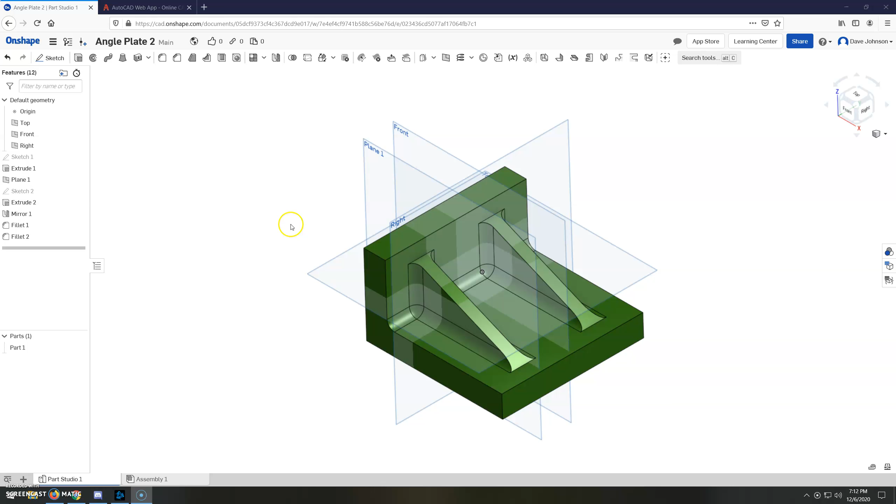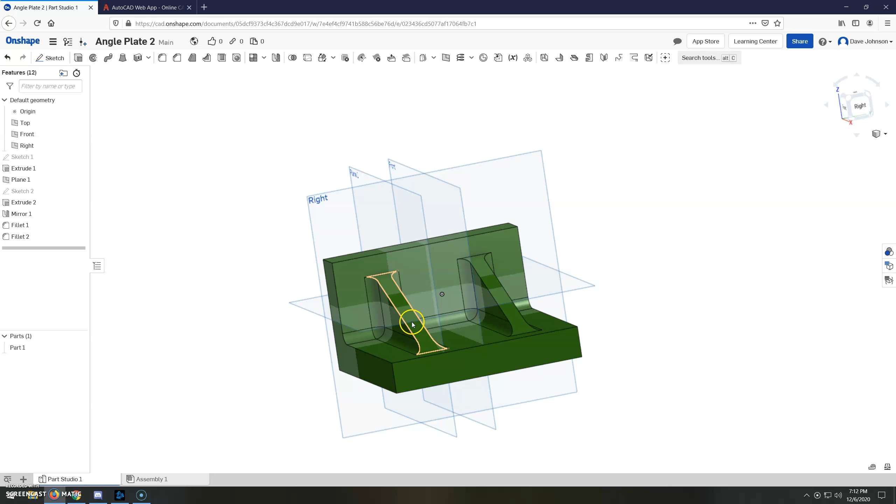Okay, today we are going to be building the angle plate in Onshape. Just take a quick look at this. It's basically composed of some basic shapes. We've got the L extrusion here, and then we have two things called ribs or webs right here, which are symmetric and relatively centered up. And then we've got a bunch of fillets to round everything out.

So let's take a look at our drawing. It's relatively simple, but there's a few things we need to be able to determine from it. So number one is the overall size of our L shape.

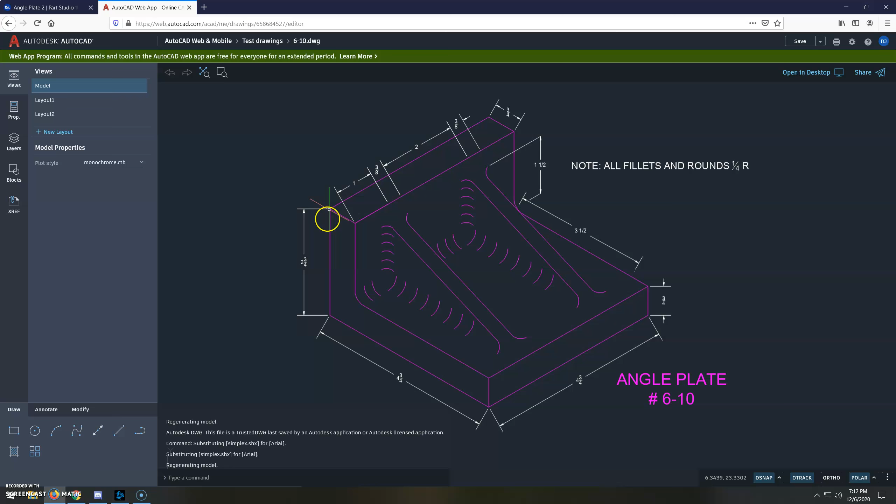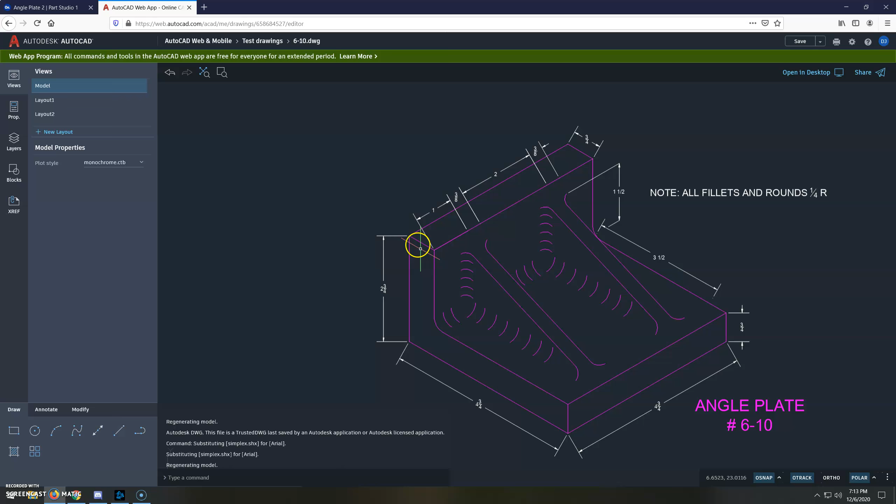Our total height here is 2 3/4 of an inch. Our total width here is 4 3/4 of an inch. And our depth, which is what we're going to extrude in the initial shape, is 4 3/4 of an inch as well. So again, like I said, we're going to start with this kind of L shape here.

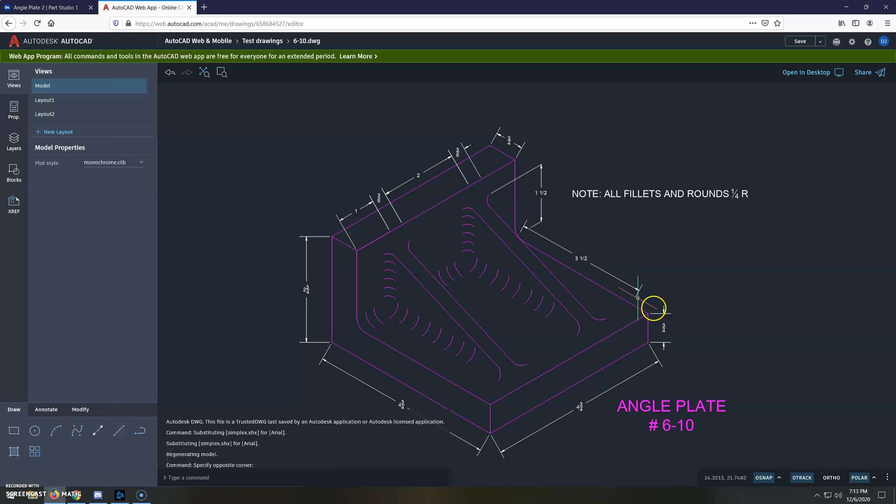You'll notice that the fillet is present here. However, it is much better to do the fillets at the very end, so we're going to save those for the last step. We're going to leave this a sharp corner here, and our material thickness on the bottom is 3/4 of an inch, and it's also on the back of the angle plate as well. It's also 3/4 of an inch.

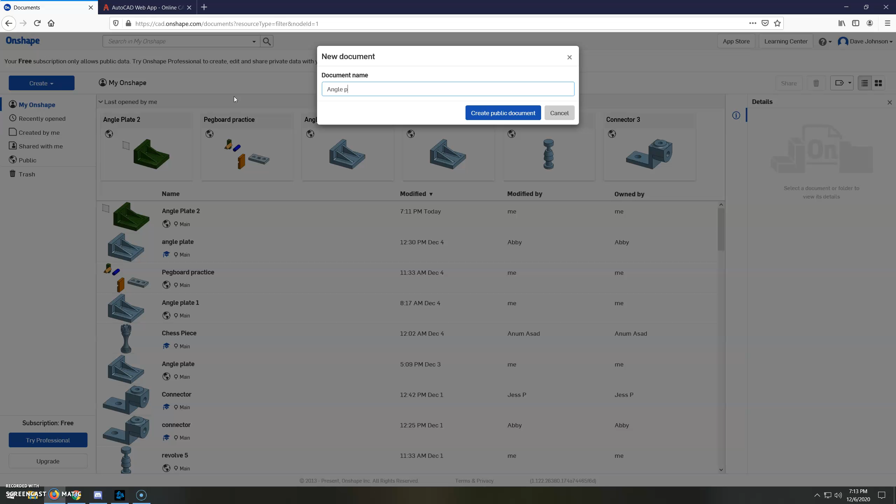So let's get started making that, and then we'll worry about the webs in a bit. So I'm just going to go back, and we're going to start a new document. I'm going to call it angle plate, let's say 3, because I think that's what I'm up to.

All right, so right on our front plane, we're going to right click and hit new sketch. We're going to view normal to our front plane. And we're going to use the line tool, and I'm just going to come down here and produce our basic L shape. And again, I'm just kind of guessing on the sizes, just making sure that everything is correct up and down.

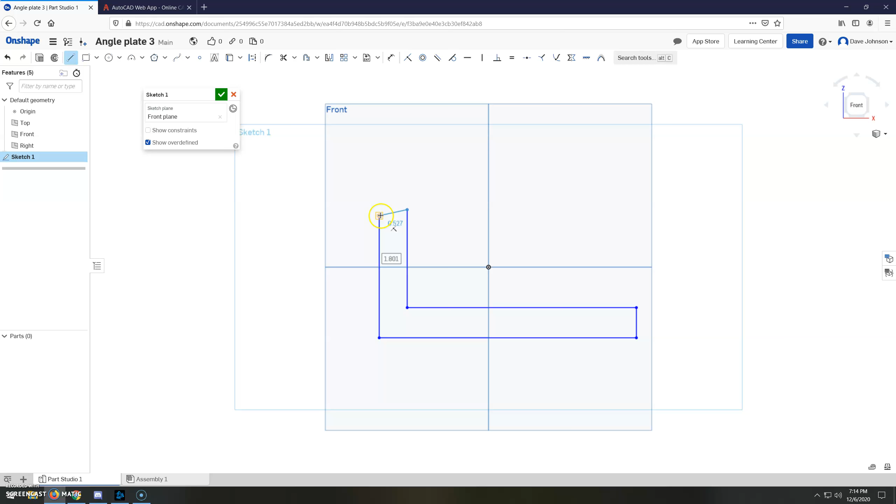Now, I'm going to purposely make a mistake here. You can see that this line is not horizontal. So if I need to correct that, I can actually come up here to our constraints and click on horizontal, and then tell it, hey, I want you to be horizontal.

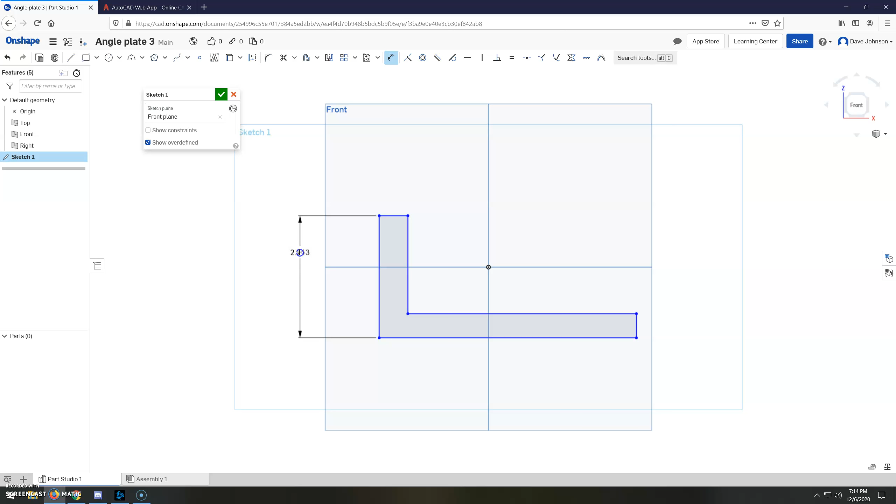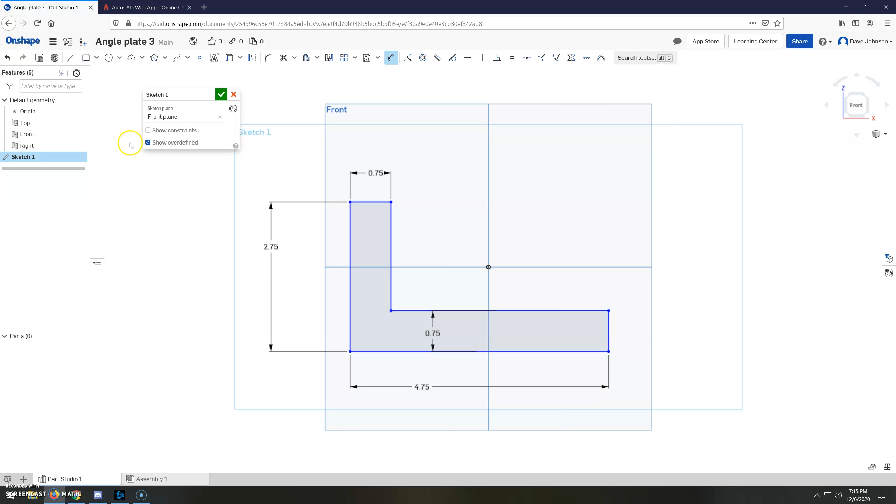All right, so let's get some dimensions going here. So remember, our height was 2 3/4 of an inch, 2.75, and our length was 4.75, and our material thickness here was 3/4 of an inch, and then our material thickness here was also 3/4 of an inch. All right, I like where that's at, so we'll just finish that sketch.

We're going to rotate a little bit, and then we'll do an extrusion. We're going to select this, make sure we're on new. We've selected our sketch, and we're going to extrude again 4 3/4 of an inch.

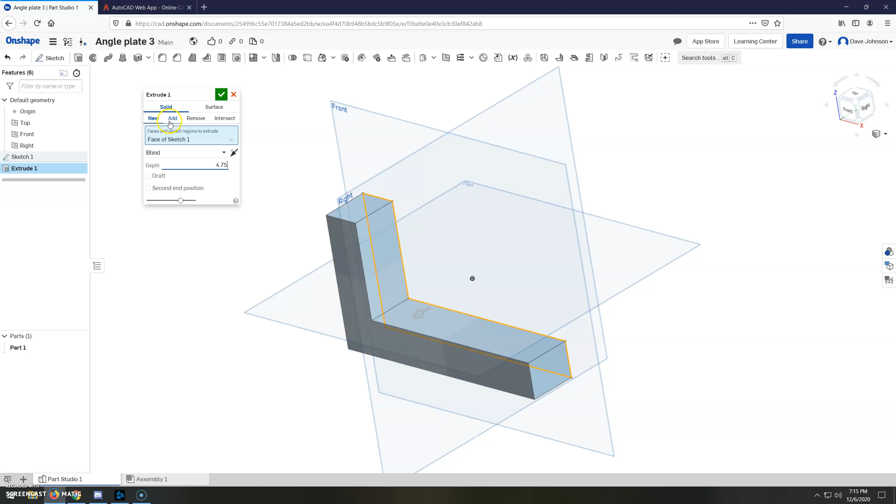So 4.75. Now, really important for this particular one, we're going to switch this from blind to symmetric, because eventually we're going to be using the mirror tool, and we want to use the front plane, which goes right down the middle, as our mirror plane, so that will be advantageous to us later on in the build.

I generally start things symmetric unless I know that they don't need to be symmetric, but if you're not sure, just make them symmetric. All right, so there's our basic L shape.

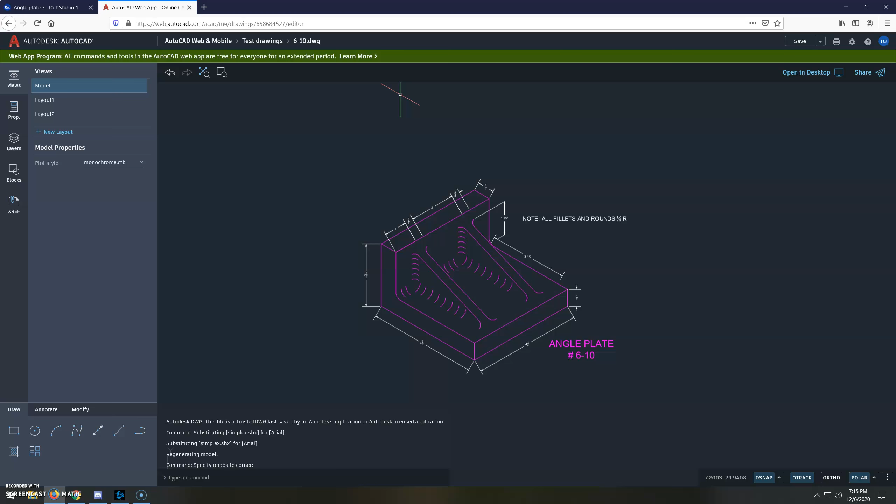Let's go in and take a look at our webs. So our webs, or ribs, those are 3/8 of an inch wide each, okay?

They are 1 inch in from the ends, 1 inch here, and then we would assume 1 inch here as well, based on our measurements, because we take 4 3/4, we subtract 3/8 and 3/8, that takes off our 3/4. Then we subtract 1 inch and 2 inches, that's 3, so that leaves us with 1 inch on the end there, plus everything's symmetric. And then we've got 2 inches spacing in the middle.

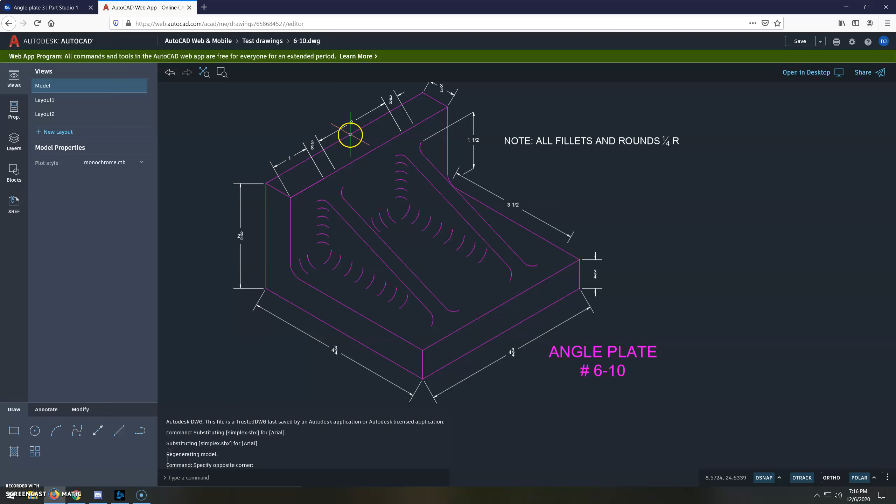So our middle plane is actually 1 inch from the edges, from the inside edges of each of these ribs. So it's actually going to be really hard for us to draw these ribs. So what we need to do is create a drawing plane that's right up against the edge of this rib. So what we'll do is we'll actually offset our front plane by 1 inch.

So what we're going to do is we're going to go in here. I just caused an error here. We're going to stay on the page. What we're going to do is we're going to offset our front plane, because again, that's right in the middle. We want to move it over a little bit to the left by exactly 1 inch.

So if we go through our tools here, we've got one that says plane right next to the helix tool, and right next to the offset surface tool. So we'll click on plane. Okay, it's got a few options here. So if we go down, we've got offset, which is most likely what we're going to use. Plane point, which is kind of nice. 3 points. So there's lots of different ways to generate work planes, as these are called.

But the one we're going to use is very simple, just offset. So basically it wants to know what plane are we going to duplicate, and it's going to basically offset it from its own direction.

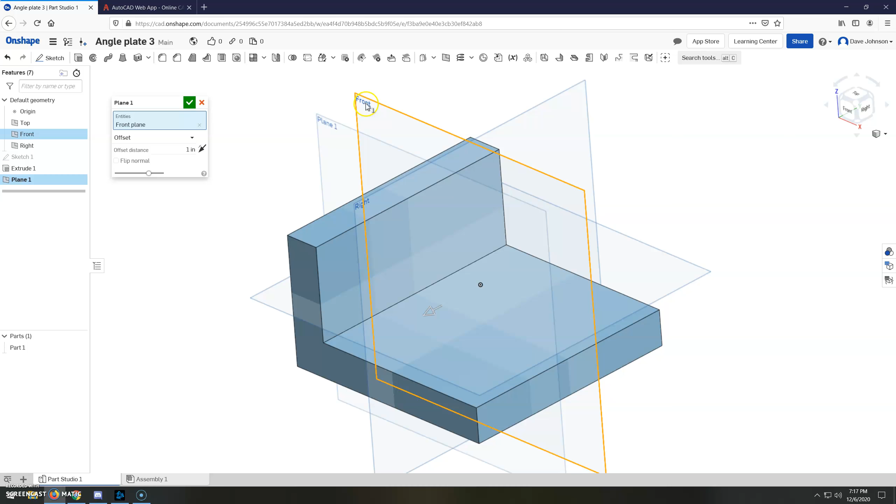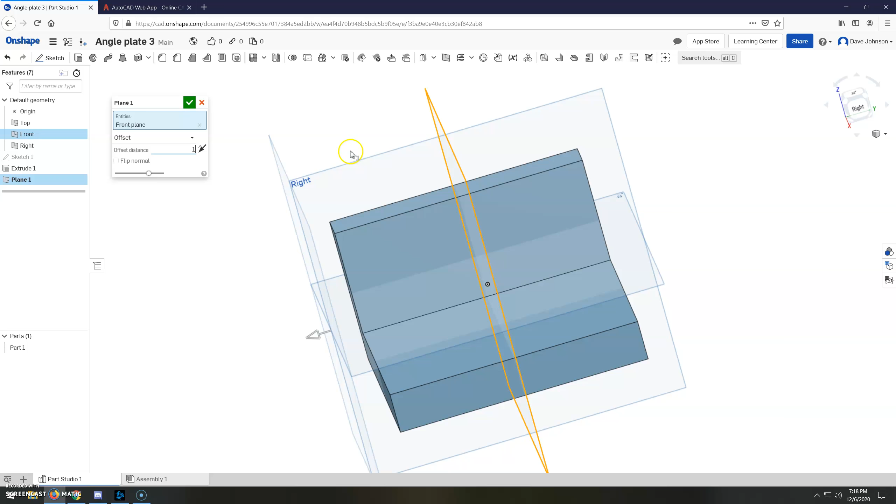So if I click on front, we're going to be fortunate in that it's going the correct direction. It could be the wrong way. And I said we're going to do this 1 inch, but maybe it's 3 inches. Who knows? I just want to show you what that does. So if I set it 3 inches, you can see how far away that plane is. It's off the material here. But again, we want this to go 1 inch, and we're going in the correct direction here, so we will just accept that.

So right-click on plane 1, we're going to make a new sketch, and we're going to look normal to it. Let's get some dimensions for our ribs. So we said they're 3/8 of an inch thick, but if we're drawing them from this direction, we need to know the height and the width, and we're going to eventually extrude them 3/8 of an inch. So what's the height and the width?

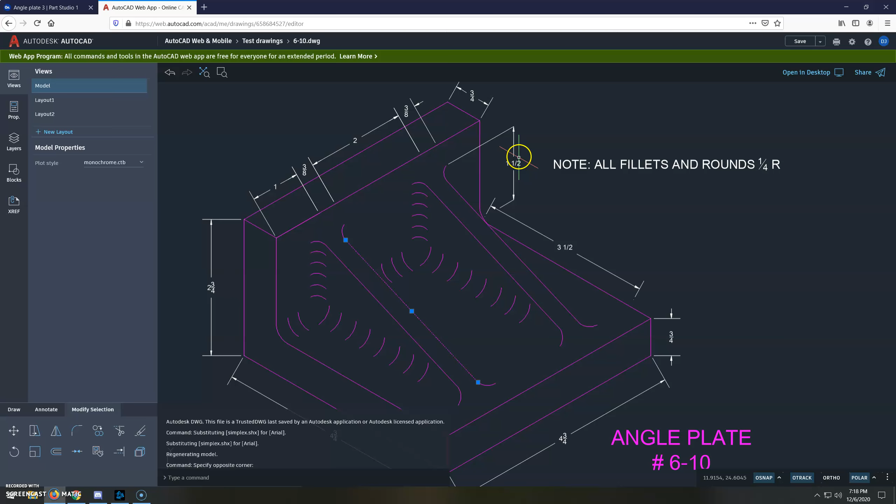Well, let's look at our 1.5 inches here. We can see that touches off of the top of one of the ribs, and then it goes down to this theoretical corner here. That's why we left that a sharp corner. And then our 3.5 also comes from there. And if we were to project that over, it would come right up to the front of these ribs as well. So our ribs are going to be 1.5 tall, 3.5 wide.

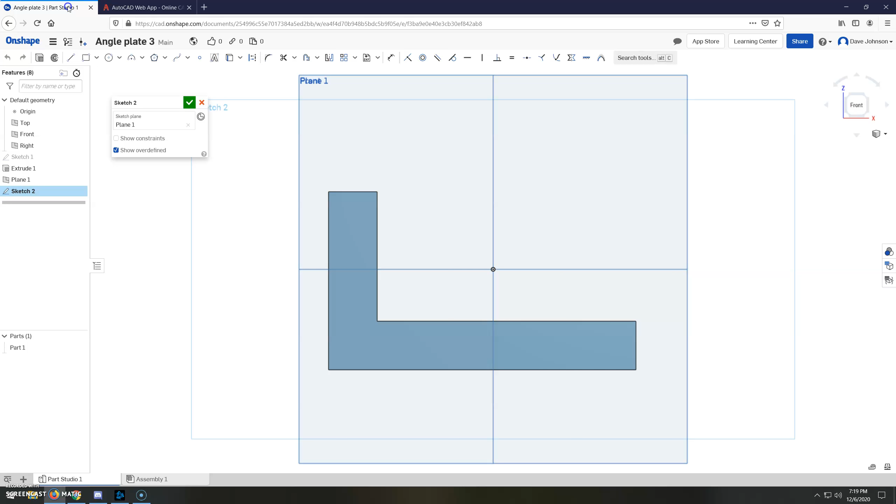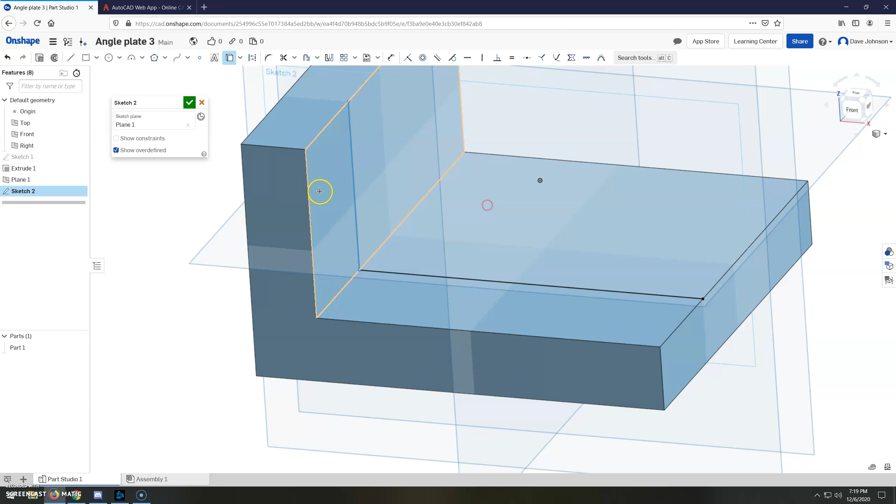So the first thing we need to do, because remember we're drawing right here, we're kind of in the middle of our material, is be able to reference these edges, because we're going to be dimensioning off of them. So we're going to go up here to the Use button, click Use, and then click this edge and that edge. Let me turn it so you can see now it's drawn those edges on our sketch plane. And we don't need Use anymore.

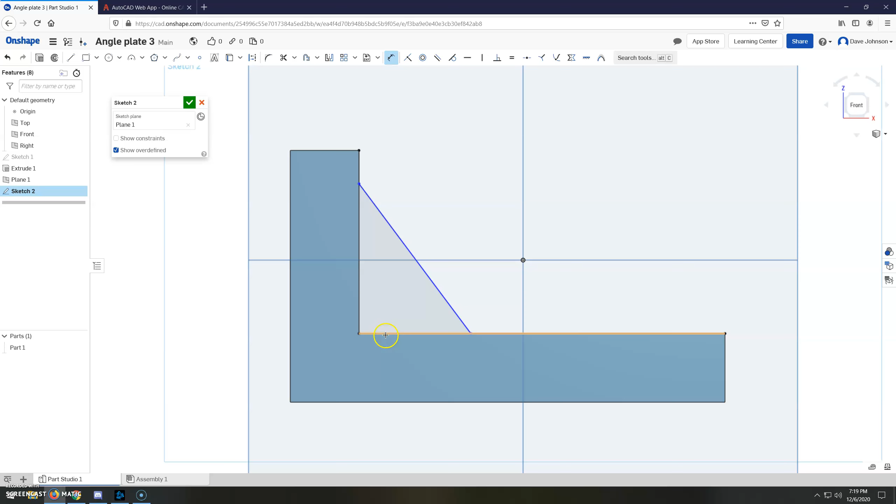Now what I can do is come in with a line and draw a triangle. I'm actually going to exaggerate the dimensions of this triangle. You can see it's now an enclosed shape that I could use. So we're going to dimension it. From the bottom to the very top, click the point, not the line, it's going to be 1.5 inches. And then from the outside edge here to this back is going to be 3.5.

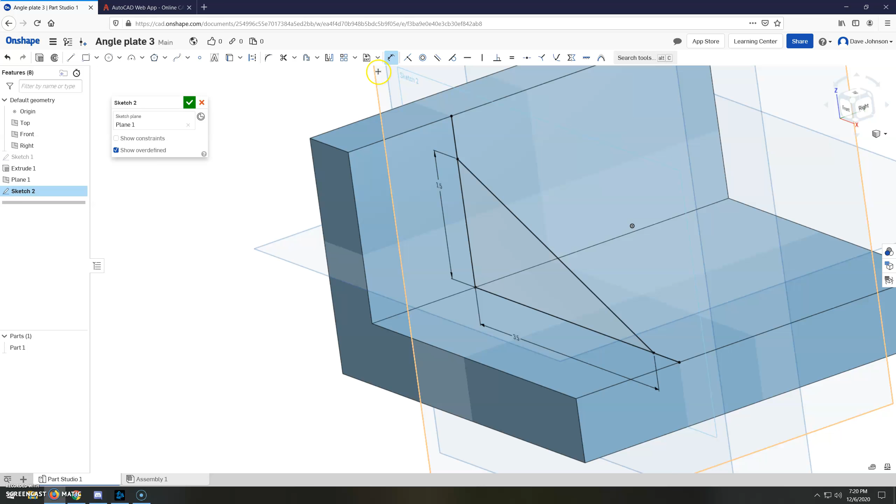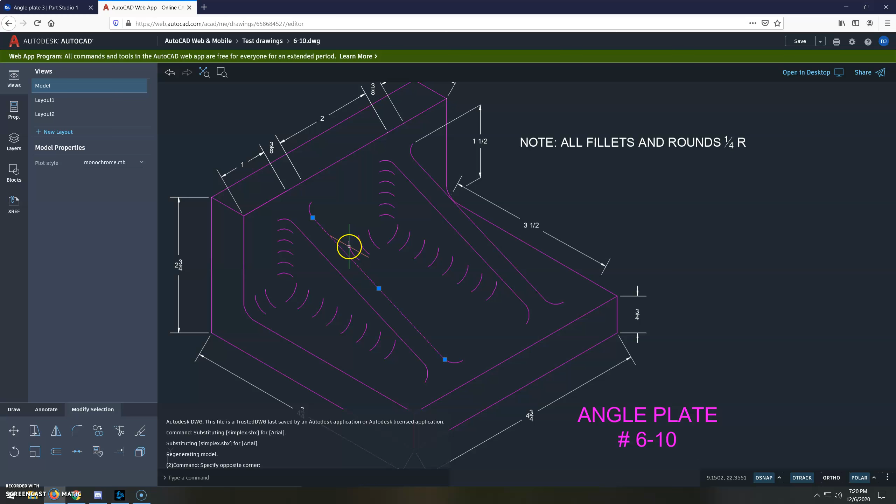And again, we'll take that, and that looks good. We'll finish our sketch. Now we can click Extrude. We will select that material, make sure that we are adding material, make sure it's solid. This is going to be a blind extrusion, not symmetric, because if you remember, this sketch plane is on the inside of this web. So we want to make sure that we are moving out toward the outside of our part here, and in fact we are. And we're going to go 3/8 of an inch out. And we'll just accept that real quick.

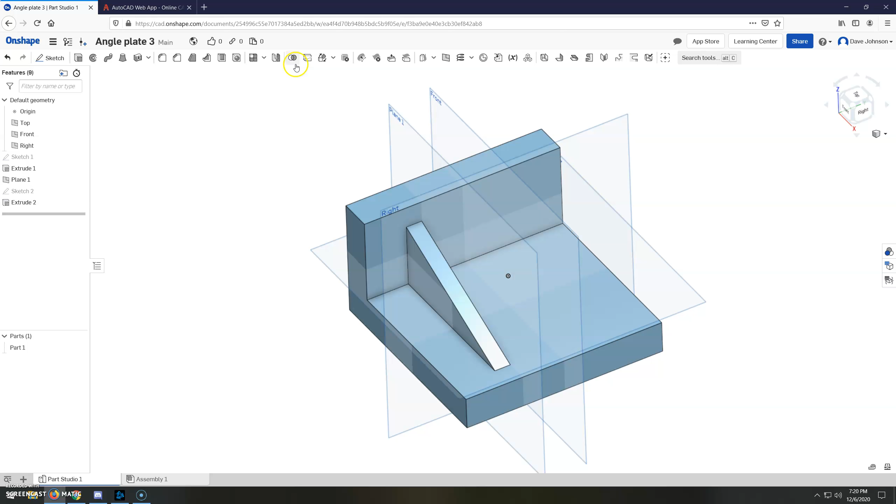And then what we want to do is duplicate this on the other side. And since we have a plane going right down the middle, rather than redo that whole process, creating another plane and drawing this and all that stuff, we're just going to use the mirror tool. So if we're in our 3D tools here, not in a sketch or anything, move down, we've got our patterns. Right next to that is mirror. So it wants to know what we're going to mirror.

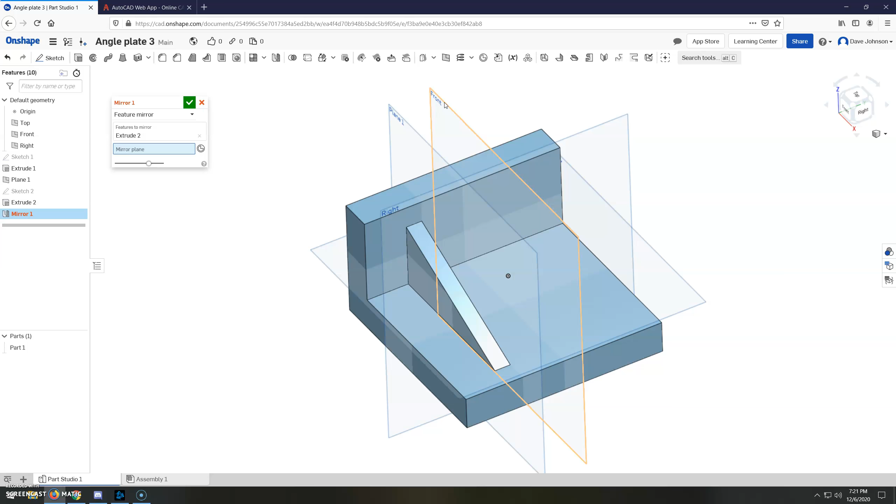The first thing we need to do is switch it from part mirror to feature mirror. It wants to know what features to mirror. The easier thing to do, rather than trying to click this, is to click Extrude 2 on the left here. We'll just click that. Then it wants to know mirror plane, so I'm going to select that red box, and click the front plane in this case, because that's the plane going right down the middle. So we're going to reflect across that plane. You can see it's previewing that. These look nice and symmetric, and we'll click Accept.

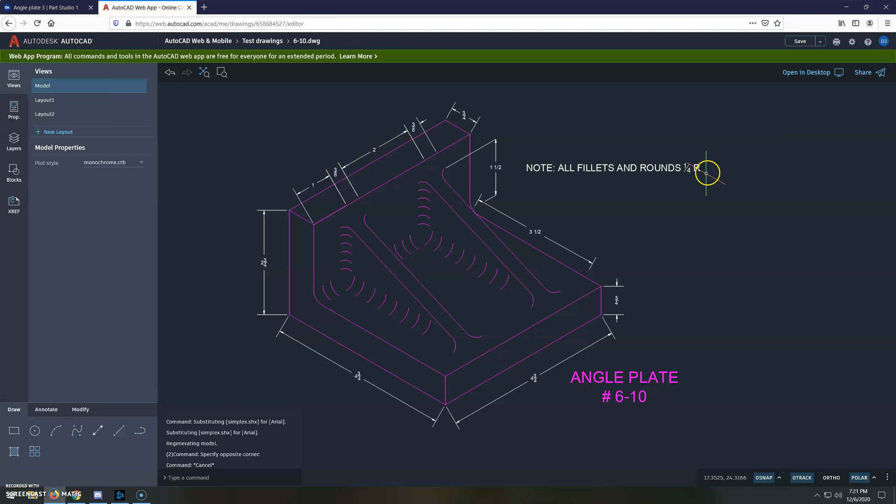All right, and then last but not least, we want to add our fillets. Now, what size are our fillets going to be? Let's look: note, all fillets and rounds 1/4 inch in radius. So that's the number that we know. Where are these going to go? We have one main fillet that goes along the back of the plate, between the back and the base. And then we have fillets along the inside and outsides of the ribs or webs. So that'll be what we do first.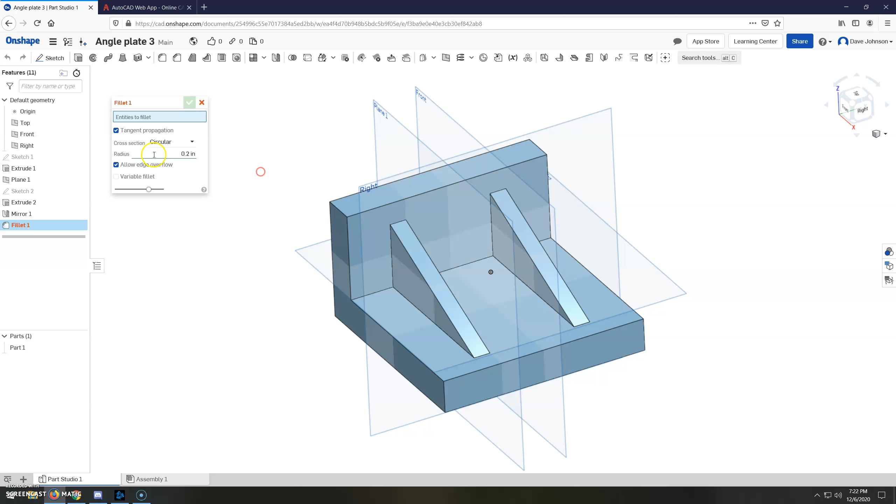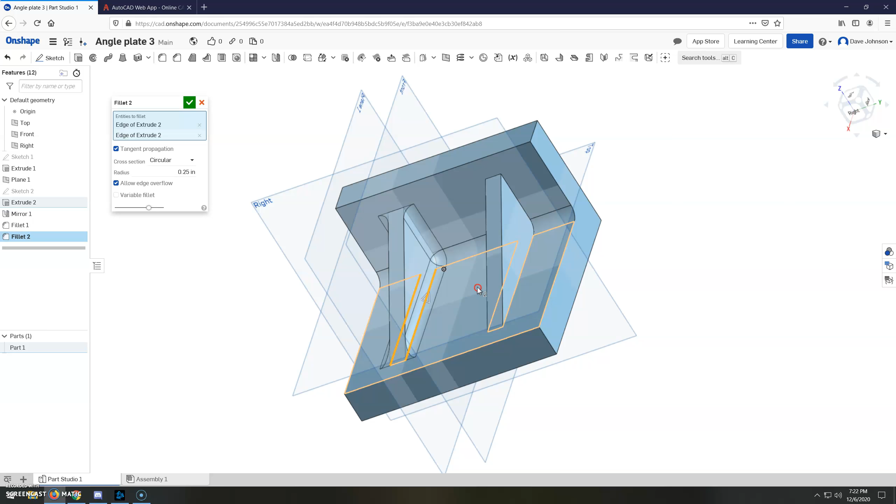So let's do the back fillet first. We'll set this to 0.25. We're just going to click carefully on lines, we don't want to click a whole surface like this, just click the line. You can see it's previewing that fillet. And then we'll do another fillet, and again reset our radius to 0.25. Here, because of us doing this one first, it actually saves us a couple clicks. As you can see, that's a continuous edge now because of the fillet, so it actually does the fillet all the way up the edge here. And it blends nicely with the one that we already have there. And there is our completed angle plate.